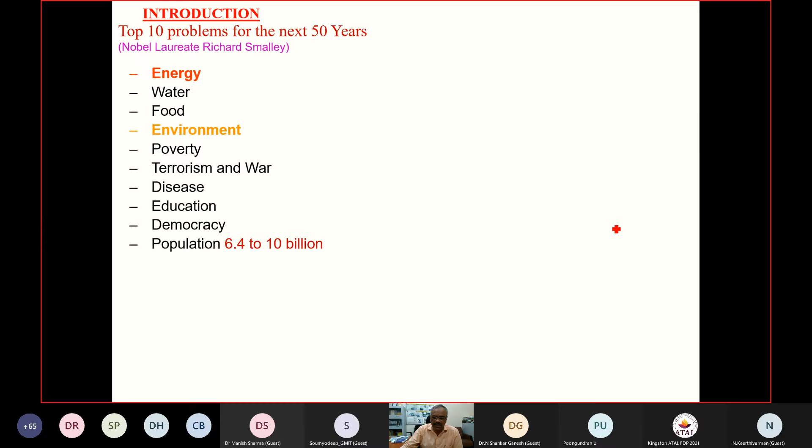We are facing several problems: energy, water, food, environment, poverty, terrorism, war, diseases, education, democracy, and population. Therefore, it's important that the energy problem cannot be addressed in isolation. Energy and environment are important, which is why we are calling it a 4E analysis: energy in terms of quality and quantity, as well as environment and economic analysis.

Food, water, and clean energy are very important. These three things are important.

Out of all these problems, energy can solve some of them, and the world's primary energy is increasing very rapidly in an exponential growth. Energy consumption is rapidly increasing because of industrialization, improvement in standard of living, and population growth. So the standard of living of any country, or an individual, depends on energy consumption. Therefore, it's very important to do a comprehensive analysis of this energy system.

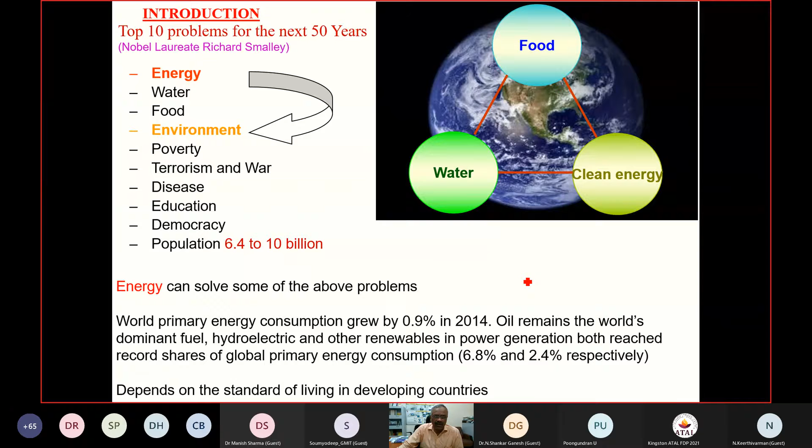In terms of exergy and thermoeconomic analysis of power generation, most of the power generation across the world and in India is primarily based on fossil fuels, which has its own adverse effect on the environment. So in order to minimize and mitigate environmental issues, it's very important to go for energy and exergy analysis of power generation.

These energy sources are broadly classified into two categories: celestial or income energy, and capital energy. Energy reaching the Earth from outer space is called income energy or celestial energy, and this includes solar and lunar energies, which we refer to as non-depletable: electromagnetic, gravitational, and particle energy from stars, planets, and the moon, and potential energy of meteorites entering the Earth's atmosphere.

Capital energy is the energy that already exists on the Earth. Examples are mainly fossil fuels, like chemical forms of energy, nuclear energy, and geothermal energy in the Earth's crust. So generally, capital energy is the source which is already present in the Earth's crust.

For power generation, power means electricity. Electricity is one of the most effective, or you can say highest quality form of energy among all energy forms. Therefore, utilizing electrical energy for our requirements depends on how we produce it, so producing cleaner energy is a better option.

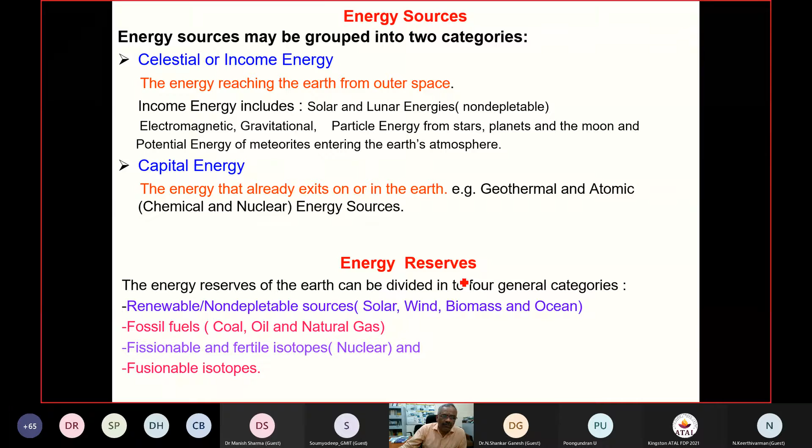If you look at the energy system hierarchy, we have primary energy sources, then energy carriers, and then equipment and services - this is the hierarchy of the energy system. We essentially have fossil fuels: coal, oil, gas, and then biomass, nuclear, and renewables.

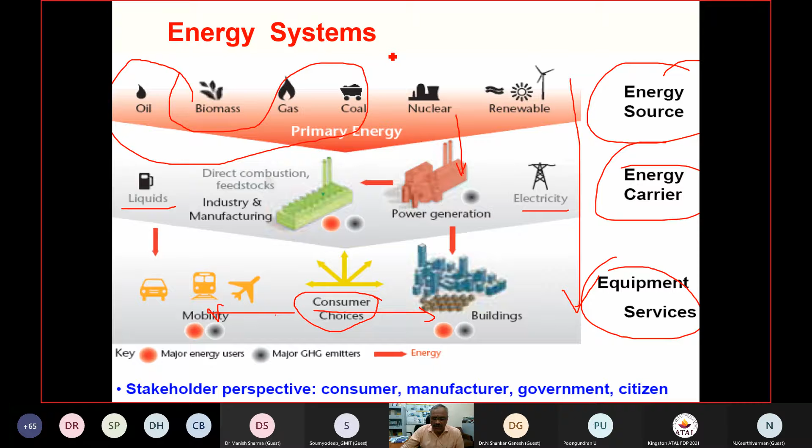These are converted into a secondary form of fuels, which could be high quality energy like electricity or liquid fuels - these are essentially energy carriers, used as per consumer choice, whether it's mobility, building operation, or any other operation. This is a typical energy system hierarchy depending upon the energy transformation effects, so it's very important to know the impact of this.

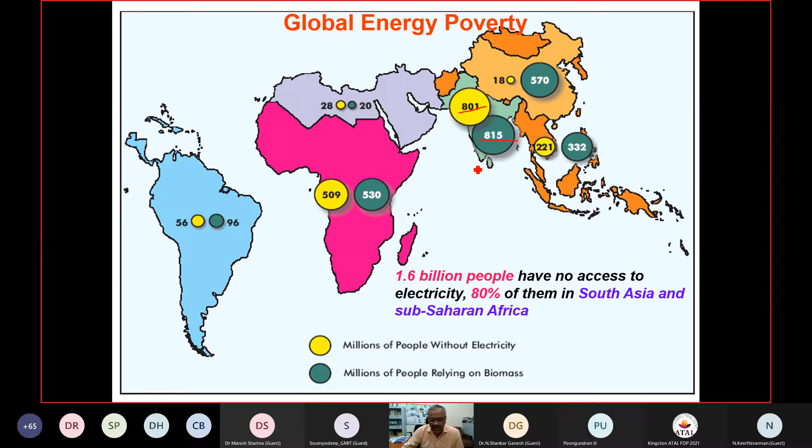So therefore, it's very important to produce electricity, this high quality energy, with renewable energy sources. Energy sustainability is very important. The energy sustainability can be achieved through making use of renewable energy.

We feel we don't deserve this type of thing, because I can say that all energy sources are being imported in India — we import coal, we import gas, we import oil, and we import nuclear energy. So if you import these fuels, mainly fossil fuels, and then try to burn them in Indian conditions, obviously it will have an adverse effect on the environment.

So Indian fuel, foreign coal, foreign fuel, and foreign technology — if you burn it in India, obviously it will have an impact on the Indian environment. So we feel we don't deserve this, but eventually we'll end up in that situation.

So therefore, energy sustainability is very important. Look at this bluish colored earth — it is surrounded by air about 15 kilometers or so, and because anthropogenic activities like energy consumption by human beings on the earth result in emissions to the atmosphere, the atmospheric air is getting polluted, and of course water bodies are getting polluted too.

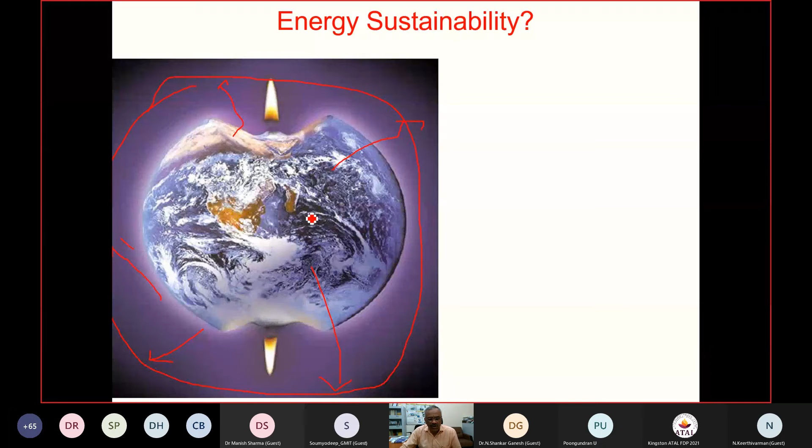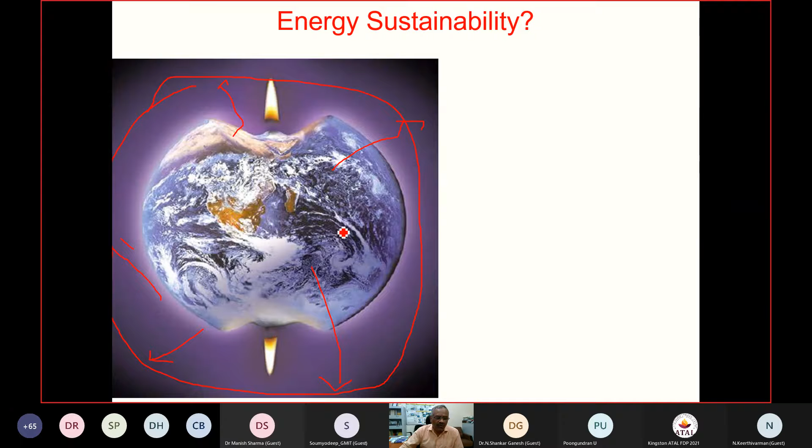Because of these excessive emissions into the atmosphere, this bluish color is completely imbalanced — we are literally burning it off. So it is important to take care of the earth, and come up with appropriate energy technologies. If you overload the Earth's atmosphere, any overloaded system looks like this — if you put too much load, it gets imbalanced. So therefore, energy sustainability is very important.

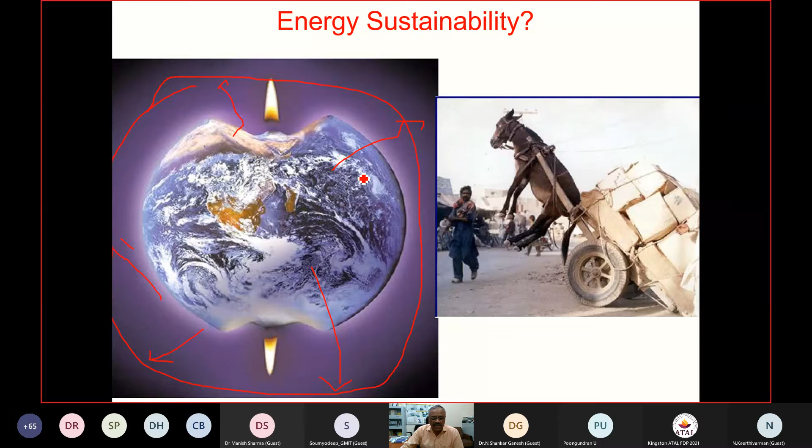The energy sustainability in terms of resources — if we have resources, and if they are fossil fuels, and you start to drain and consume them, this will become empty at one point of time. That means the resources may exhaust, so this may not be a sustainable option.

Therefore, it's very important to come up with indigenous technology and to keep these resources for future generations, so that we can take care of our own share of fuel or resources. But for that, we may need the technology — an energy technology which keeps the resources sustainable. Therefore, those energy technologies are renewable energy technologies.

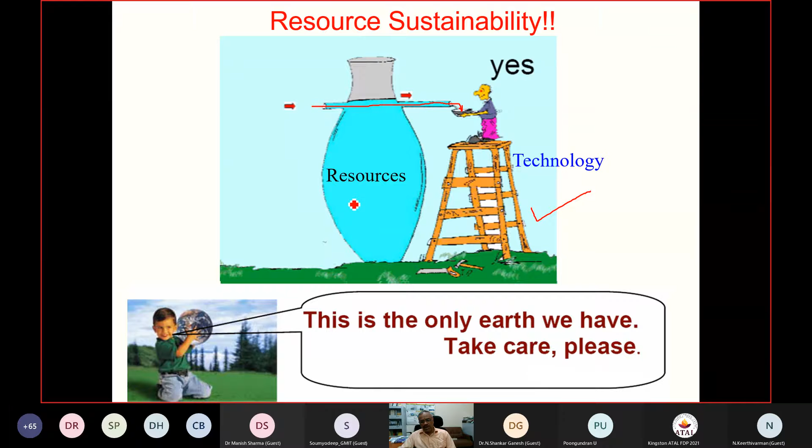Our future generation says there is only one earth we have to take care of, otherwise the earth will become unconducive for living. Therefore, energy sustainability is important, and this could be achieved through energy efficiency, proper mix of energy sources, and making use of renewable energy technologies or renewable energy sources.

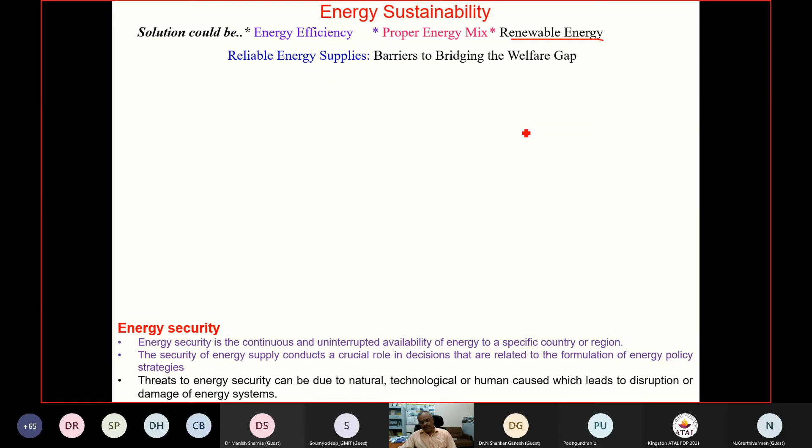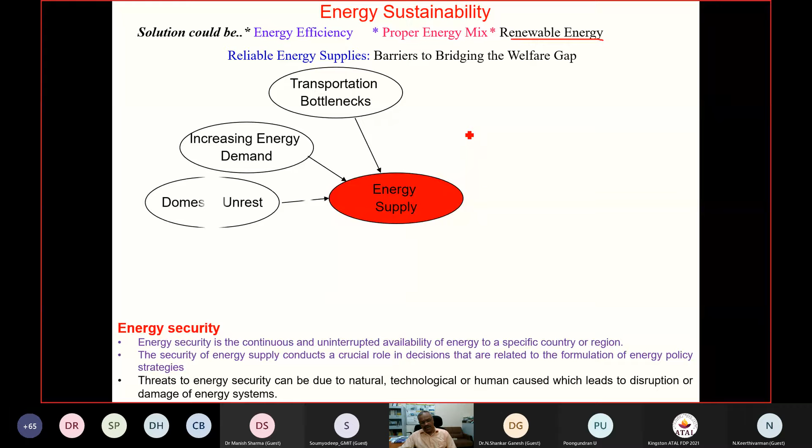So there are barriers to bridge the welfare gap, mainly in order to obtain reliable energy supply. The energy supply is very important. There are several barriers for bridging this, including transportation bottlenecks, increase in energy demand, domestic unrest, energy investment, market deregulation, energy price volatility, technological development, geopolitical instability, increase in energy imports, and so on. So there are several bottlenecks for supply of energy.

There is a substantial increase in demand, as just mentioned, because of industrialization and increase in population and standard of living, which may result in increase in energy demand. But whether this energy demand can be fulfilled by Indian or indigenous fuels - obviously at this point of time no, because we import coal, oil, gas, and more than 70% of oil is being imported. So there is domestic unrest, and the investments that are going in are also very important.

The market is deregulated, and the prices are highly volatile. Every day the petrol prices are getting changed. There should be technological development for energy efficiency, but apart from that, there is geopolitical instability, mainly in the OPEC countries - they cut the production, then obviously the prices will go up, and increasing energy imports is another major problem. That is why the government is more interested in depending on indigenous fuels and so on.

So then one can think of vehicles like energy efficient vehicles, biofuel vehicles, hydrogen fuel vehicles - we are talking about EV, electric vehicles, and so on - and going for new technologies in the building sector, because the building sector is one of the high energy intensity sectors, since most of these buildings are enclosed with glass and other things and require space conditioning.

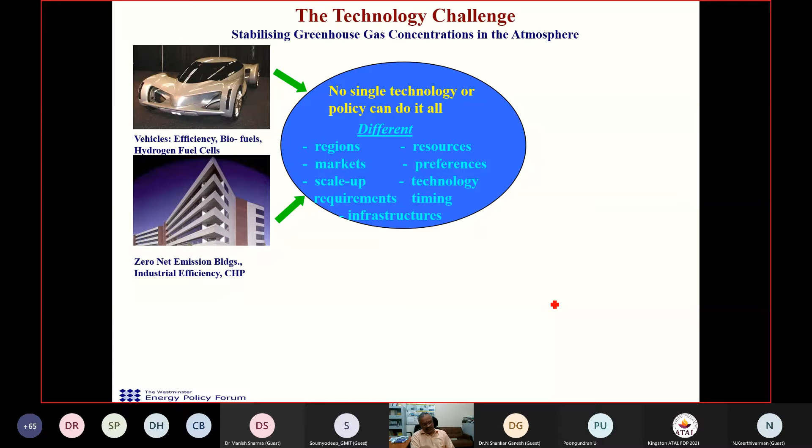Therefore, net zero emission buildings are important. Industrial efficiency is another option, even for industrial buildings. CHP, combined heat and power, is another option for such buildings and so on. Nuclear power generation with 4th generation technology is an important thing, and apart from that, fossil fuel combustion results in emissions, and mainly carbon dioxide is a major environmentally degradable gas, so it needs to be captured - that is carbon sequestration.

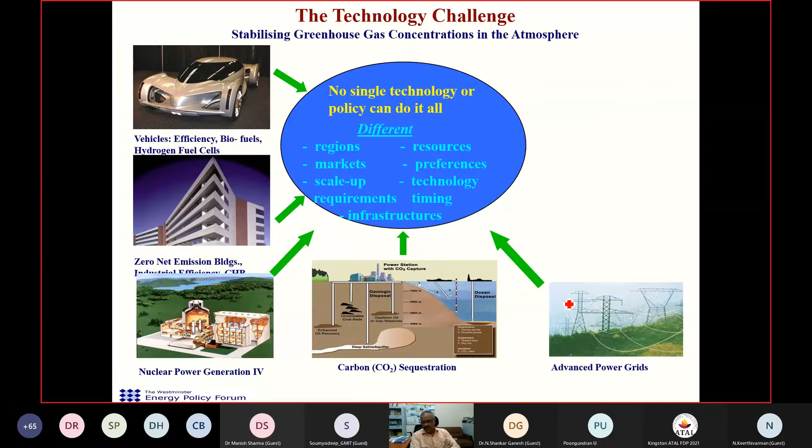It should be captured properly and then stored properly, so that the CO2 is absorbed and used for other applications. Advanced grid transmission and distribution of electricity is also very important, as there is a lot of power losses during transmission and distribution, which may result in very large losses due to T&D losses. That is why we need to transport electricity in the most efficient way with less losses - that's what we call advanced power grids. There is a necessity for that.

Biofuels and power generation is another important aspect, and renewable energy technologies play a major role in this technological challenge. Everywhere - in EV vehicles, net zero buildings, nuclear, carbon sequestration, advanced power grids - technology plays a major role. Therefore, a single technology cannot address this problem.

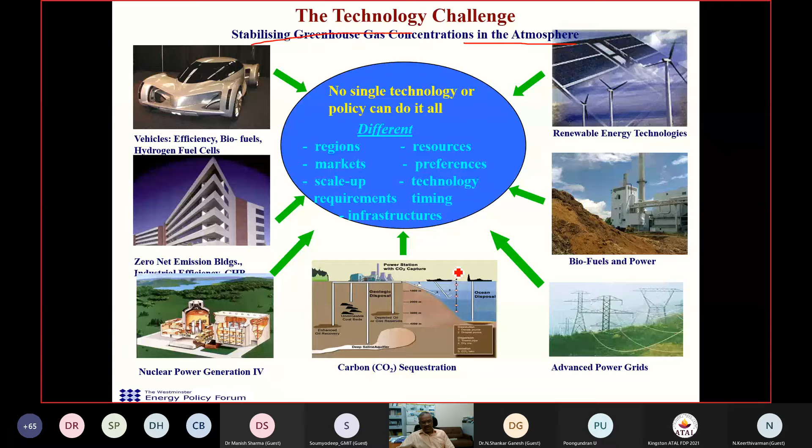There are several challenges, and these technologies eventually result in stabilizing the greenhouse gas concentration in the atmosphere, as we are experiencing global climate change, which may reach very dangerous levels. So therefore it's very important to stabilize the greenhouse gases.

Now, in the Indian context, the power sector is important because power is the highest quality of energy among other forms like thermal, electrical, and mechanical energy. In thermodynamics, you have two quantities like heat and work. Heat can be converted into work, but not completely, whereas work is completely converted into heat. So therefore, work is more valuable and of more quality than heat. So it is important to come up with work in terms of power and so on.

So if you look at the power generation in India, it is increasing slowly, and per capita electricity consumption is increasing rapidly. Now it is somewhere close to about 400 to 500 kilowatt hours per person per year, but it needs to be increased up to 3000 kilowatt hours per person per year. It's projected that energy consumption is rapidly increasing.

So if you look at the current projected installed capacity based on different sources, coal is highest now, but renewable energy is also gaining importance, so there is a lot of potential. But for at least another 2 to 3 decades, fossil fuels continue to be, like coal continues to be, a major fuel for power generation.

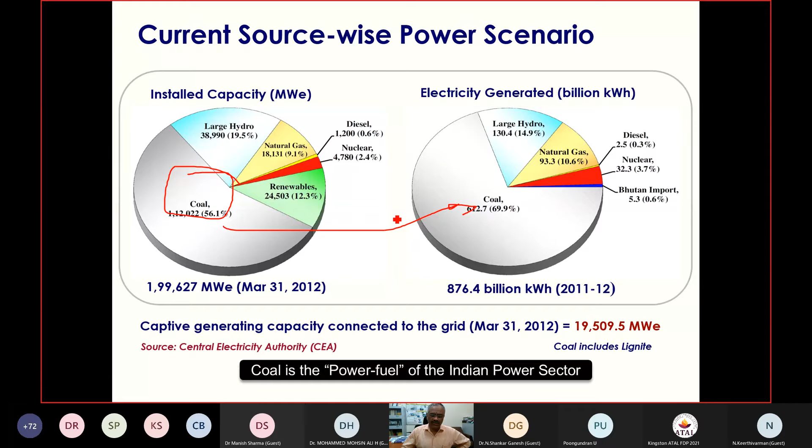So it is very important to look at why we are going for 4E analysis. If you look at the per capita energy consumption in India, it is somewhere at this level, and the world's is higher, and of course other developed countries are much higher. So therefore it's necessary that we should improve per capita energy consumption without affecting the environment.

That is why a holistic or comprehensive analysis of power generation is required through the 4 E's: energy, exergy, environment, and economic analysis. It is a comprehensive analysis to investigate the efficiency, energy utilization, environmental degradation, as well as the economic viability. So that's why we call it 4 E's.

Challenges: the plant efficiencies of Indian power plants are relatively lower due to high ash coal and high cooling water temperature. As most of you are mechanical engineering students, you know power is actually produced by a heat engine which operates between two reservoirs, taking heat from a higher heat source, converting it into work W, and then rejecting the remaining heat into the atmosphere at some atmospheric temperature T2.

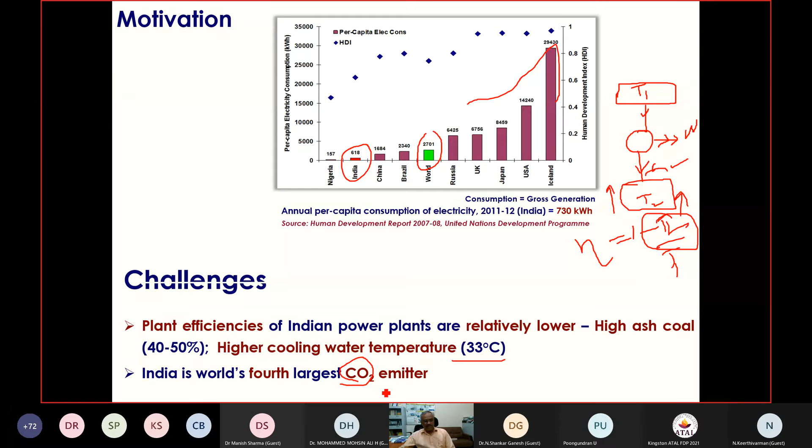So it is very important and challenging to come up with a comprehensive analysis of power generation that balances the trade-off between energy, environment, and economics. We are doing a 4E analysis of power generation, primarily focused on coal-based power generation.

How do we include solar energy so that we can reduce coal consumption as well as environmental degradation? Not only can we reduce environmental degradation, but we can also save fuel.

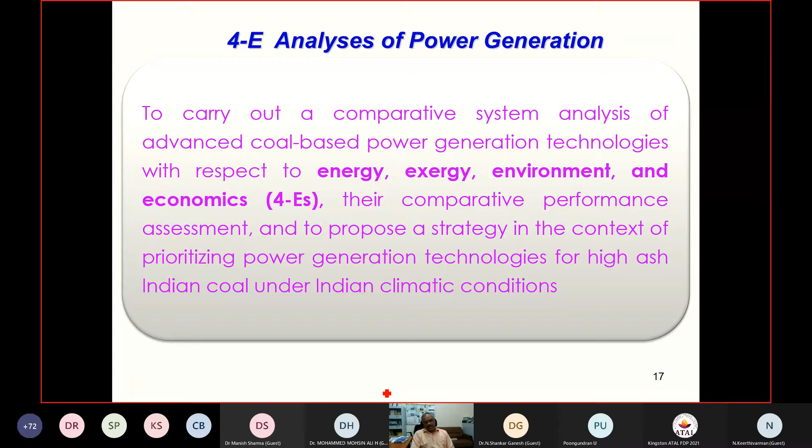In order to do that, we conduct a comparative system analysis of advanced coal-based power generation technologies with respect to energy, exergy, environment, and economic analysis, which we call 4Es, with comparative performance assessment to propose a strategy for prioritizing power generation technologies for high ash coal like Indian coals under Indian climatic conditions, given the higher atmospheric temperature.

Looking at the energy consumption and available sources, if used in this fashion, they may become extinct within a certain number of years. Coal can last only 119 years, oil can last 46 years. This is a global phenomenon, though we have also given the Indian figures.

Looking at coal and oil, oil may not even last one more generation. These are the Indian statistics against world statistics for coal, oil, and nuclear. They may become extinct in a couple of years, and we may not be able to find these resources.

Therefore, it's high time to come up with an exergo-thermoeconomic analysis of power generation in order to identify the inefficiencies and irreversibilities, and also improve performance.

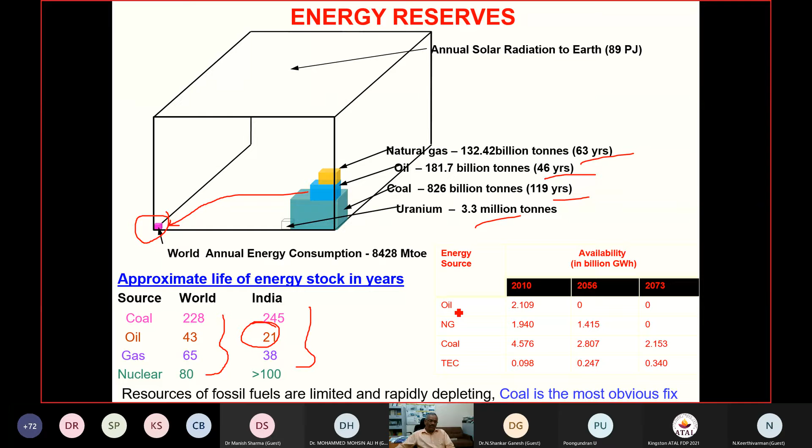Next, we'll discuss the scope of 4E analysis. Since the audience is very broad, I will cover various power generation technologies with respect to 4Es, both conventional and advanced power generation technologies, mainly for high ash Indian coal and imported coal.

We can also compare imported coal. Most of the eastern and western coast plants import coal from Indonesia, Australia, and South Africa. These imported coals have low ash but high sulfur, about 2% sulfur. Indian coals contain only 0.5% sulfur but 30 to 40% ash, whereas imported coals have about 10 to 12% ash but 2% sulfur.

Sulfur dioxide is harmful. Another important thing is that Indian atmospheric temperature of 33 degrees is taken as average, and based on this we have done analysis for subcritical, supercritical, and ultra-supercritical power plants. Based on this, we come up with different combustion technologies as well.

The combustion-based technologies include pulverized coal and ACFBC and PCFBC, which I'll explain. PF is pulverized coal fired combustion. ACFBC is atmospheric circulating fluidized bed combustion, and PCFBC is pressurized circulating fluidized bed combustion. OCC is oxy coal combustion. PPCC is pressurized pulverized coal combustion, and IGCC is integrated gasification combined cycle.

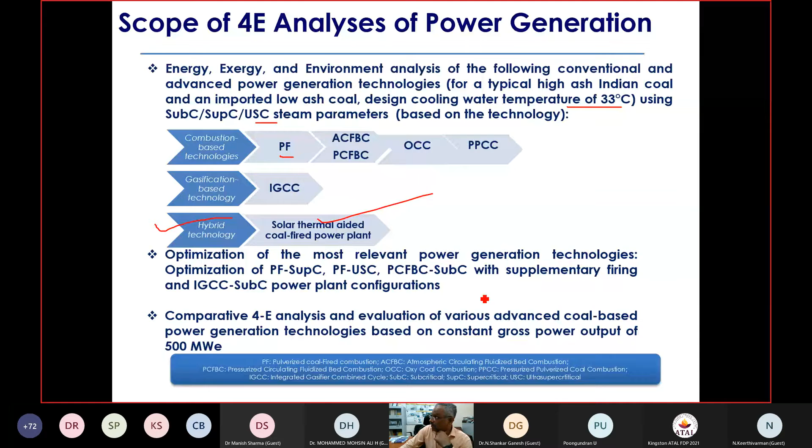So the scope of this 4E analysis includes this, but finally I will only discuss the solar aided coal-based power generation.

You have already heard about exergy, energy, and the difference between them, but I'll give some additional information related to that, because this is my point of view. Generally, exergy is equal to energy minus anergy losses. So here you have energy and losses - one tells quantity and the other tells quality.

Exergy is the maximum work obtainable as the system comes to equilibrium with the surroundings. The higher the value of exergy, the more work obtainable from the system. We discussed the first law and second law - the first law tells us the quantity of energy, and the second law tells about the quality of energy.

The first law of thermodynamics makes only an energy balance of the system or control volume. It doesn't distinguish between different forms of energy, particularly work and heat, or heat available at different temperatures - meaning internal energy. It is the second law which asserts that, from an engineering point of view, all forms of energy are not of the same quality. Energies of two systems may be quantitatively equal, but qualitatively different. For example, if you take steam and adiabatically throttle it, the energy does not change, but the quality degrades.

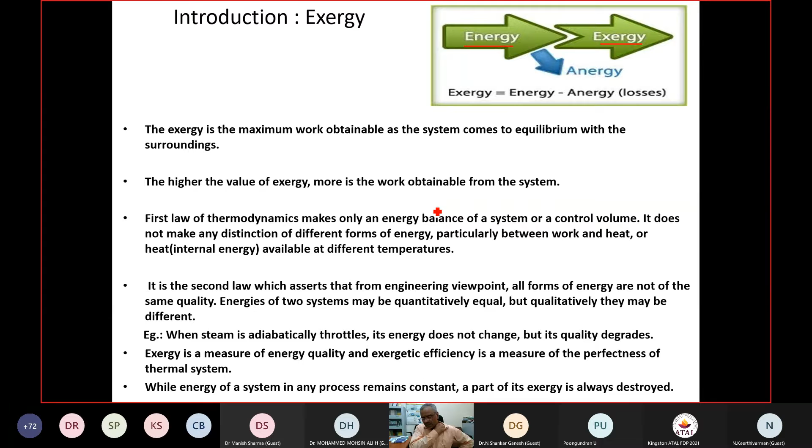Exergy is a measure of energy quantity and energy quality, and exergetic efficiency is a measure of the perfectness of thermal systems. While the energy of a system in any process remains constant, part of its exergy is always destroyed. This is about exergy.

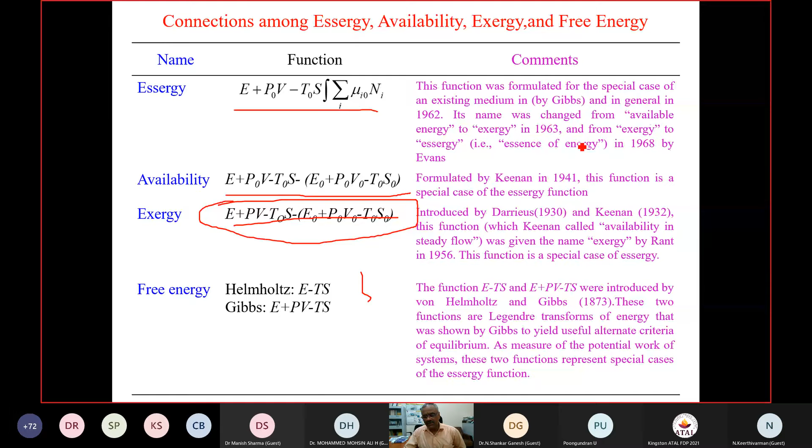E is the internal energy, P is the pressure, V is the volume, T is the temperature, and S is the entropy. Free energy, like Helmholtz or Gibbs free energy, is given by these expressions, and their descriptions are given here. There are several indicators given in this fashion, but I am not going to discuss them.

When we look at second law analysis, we generally come to effectiveness or exergetic efficiency. Effectiveness is given as the theoretical minimum available work to accomplish a task, divided by the available work to accomplish the task - a ratio also represented by epsilon. That means it's a ratio of the energy, work, or heat usefully transferred by a system to the maximum possible heat or work usefully transferable for the same function using the same energy input as the given system.

So the factors - because generally there are inefficiencies involved - there are several factors which influence these inefficiencies. The factors that contribute to inefficiencies are losses, which result in loss of energy or availability, and these include several types that differ from energy form to energy form.

For example, if you look at mechanical energy, friction, impacts, and damping are the major sources of irreversibility. For fluid energy, line losses, fluid leakages, flow restrictions, fouling, and corrosion are the major sources of energy loss.

Heat energy loss occurs by convection, conduction, radiation, infiltration, and exfiltration, which are the major sources of irreversibility, because heat transfer cannot occur at constant temperature. In order to transfer heat through convection, conduction, or radiation, there is a basic requirement of a temperature difference or potential, delta T. This delta T results in the transfer of heat. If delta T is higher, the potential is higher, but so are the losses.

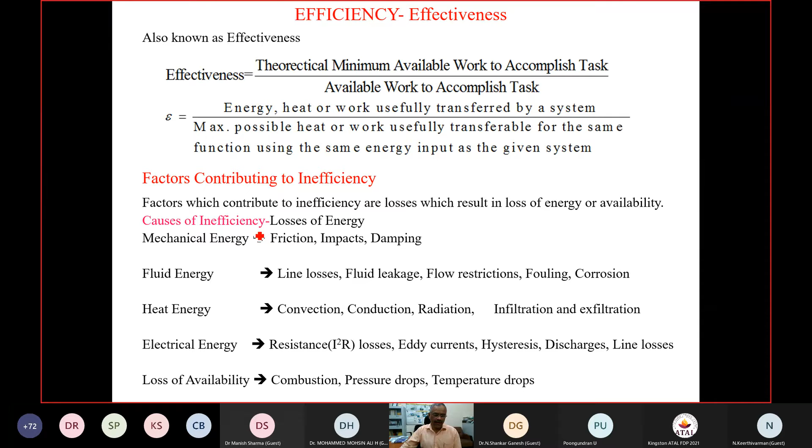Apart from that, electrical energy losses mainly involve I-squared-R losses, eddy current, hysteresis and discharges, and line losses - several of these are involved. And of course, loss of availability through combustion, pressure drops, and temperature drops are the major factors contributing to the inefficiencies of the system.

How do you write the second law efficiency? The first and second laws of thermodynamics for a steady flow process with multiple inlets and exits can be expressed as Q dot minus W equals sigma m dot, considering the exit minus entry streams.

So the second law, based on entropy generation, is always greater than or equal to zero. Therefore, entropy at the exit minus entropy at the entrance, and of course the entropy by the surroundings.

Here, Q surroundings is minus Q, because it's given to the atmosphere, it's lost to the atmosphere. S generation is the entropy generation of the process.

Eliminating all heat transfer terms, we come up with a comprehensive analysis of work transfer, and this is the actual work done during this process, which is also useful work, since steady flow devices have fixed boundaries and do not involve any work done by or against the surroundings. So this is the second law equation based on this.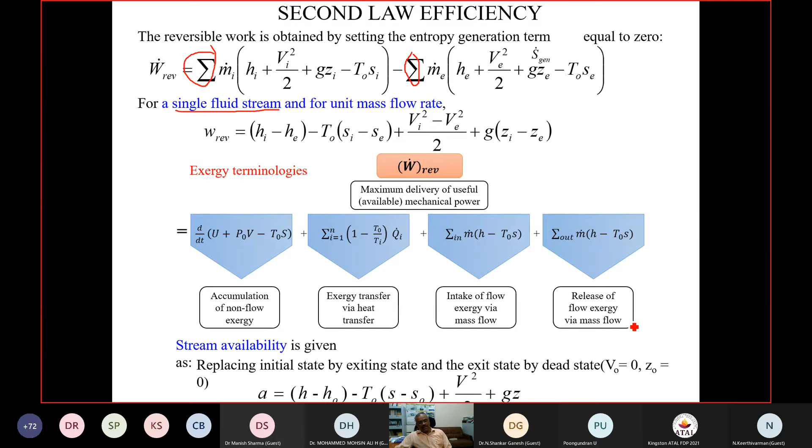So if you replace that, you'll get the availability term, and this reversible work is the change in availability, which can be given by this change of availability, A1 minus A naught.

So the rate of irreversibility associated with steady flow processes is also important. You can see here irreversibility is given by reversible work minus the useful work, and so it can be given as T naught into S generation dot.

So therefore this irreversibility needs to be calculated for every process, and then we try to minimize it based on this, based on the availability.

So what is the significance of exergy? You can look at this equation, the generalized equation with multiple entries and exits, and the maximum work, and this is the last term where the exergy work loss, or loss of available work, is always positive.

So therefore the work is given by reversible work minus the irreversible work. So irreversible work equals reversible work minus irreversibility. So therefore the exergy loss is given by this term.

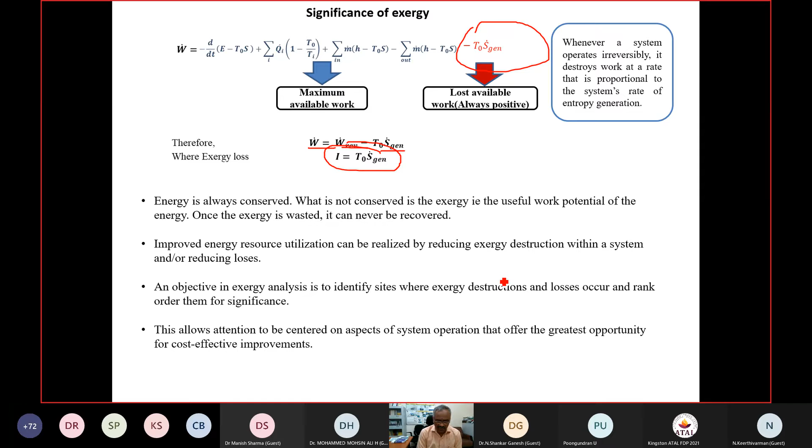What I mean to say here is that exergy analysis of power generation means you have to identify the sites where there is irreversibility or exergy destruction or losses occurring, and put them in a sequence. You have seen power plants have four processes: heat addition in the boiler, expansion in the turbine, heat rejection in the condenser, and pumping. If you look at these four components, where is the highest irreversibility? You prioritize and put them in order of significance where the high irreversibility exists.

So therefore I will give you a simple Rankine cycle. Just now I mentioned it involves four processes: you have heat supply at the source, expansion in the turbine, heat rejection in the condenser, and pump work added to bring it back to the system, and it undergoes a cyclic process.

So the exergy analysis of each steady flow component of the power cycle allows us to determine the distribution of irreversibility among the cycle components. So therefore, where we find high irreversibility in these four components is important. Then accordingly we can fix the problem and improve the performance of the power generation cycle.

The Rankine cycle, consisting of four steady flow components—pump, heater (boiler), turbine, condenser—operates between TH and T naught, and the energy interactions experienced by the components are indicated by arrows that point in the correct physical direction.

You can see the directions of these arrows here. This arrow is going out, this arrow, and this arrow, and then the work is in here and here, then work is out, and then heat is in and heat is out.

So I'll give you one simple combustion process, exergy analysis of combustion. This is given by this equation. It's a chemically reactive system. The standard Gibbs function change is given by that, and the change in enthalpy of formation is delta H, and this is in terms of minus NCV.

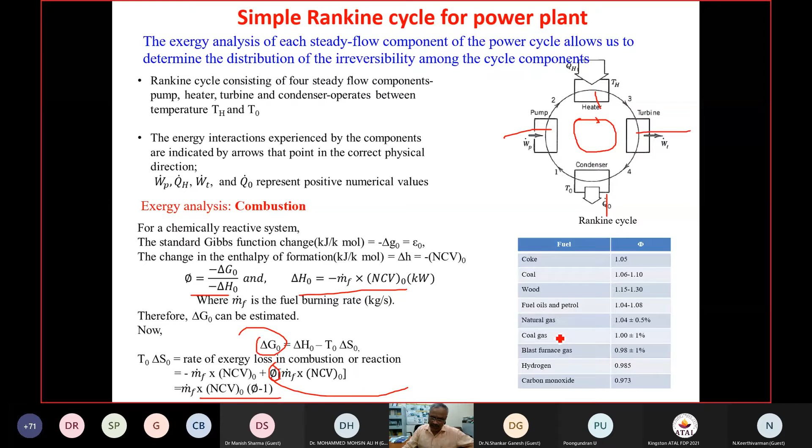Now if you look at this phi, the phi is an important value here. The phi value for different fuels like coke, coal, wood, fuel oil, petrol, and so on, their values are mentioned here.

So therefore, in second law analysis of mainly vapor cycle, we need to find out irreversibility. Irreversibility of steady flow systems, using the steady flow energy equation, exchanges heat with the reservoir at temperature Tr, and can be expressed in terms of I naught, I dot, which is T naught into S generation dot, and that is given by the previous equations.

When you have multiple entries, sigma will come in, and multiple exits. For irreversibility of any steady flow system, consider unit mass with single inlet and single outlet, then you can eliminate the sigmas here, and you get this, which per unit mass is I, not capital I.

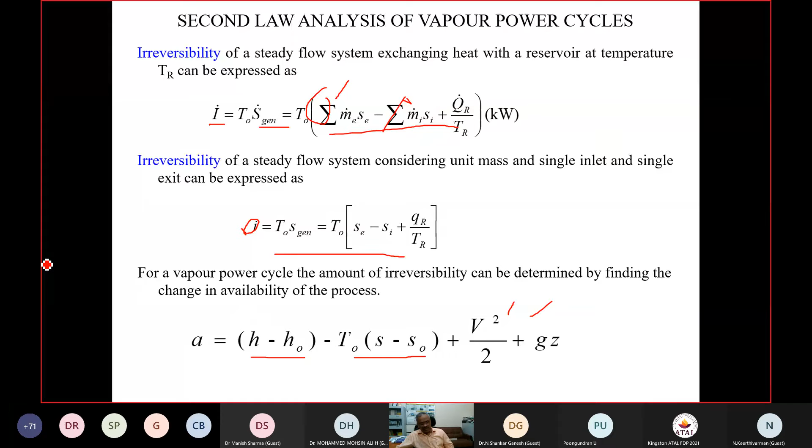For vapor cycles, the amount of irreversibility can be determined by finding the change in availability of the process, that is availability with reference to enthalpy, with reference to heat, and then with kinetic energy, potential energy, and so on. So the datum or reference point is taken as H0, where the energy transformation or availability occurs.

So our methodology, though I mentioned 4E here, economic analysis will come later. So for the energy, exergy, environmental analysis, we carry this out using a flow sheet program, which we call Cycle Tempo.

Cycle Tempo is a flow sheeting software, and essentially mass balance is done, energy balance is done, exergy balance is done - physical exergy balance and chemical exergy balance - and finally chemical species balance have been done with these, and these are the parameters. Anyhow, you can go through that.

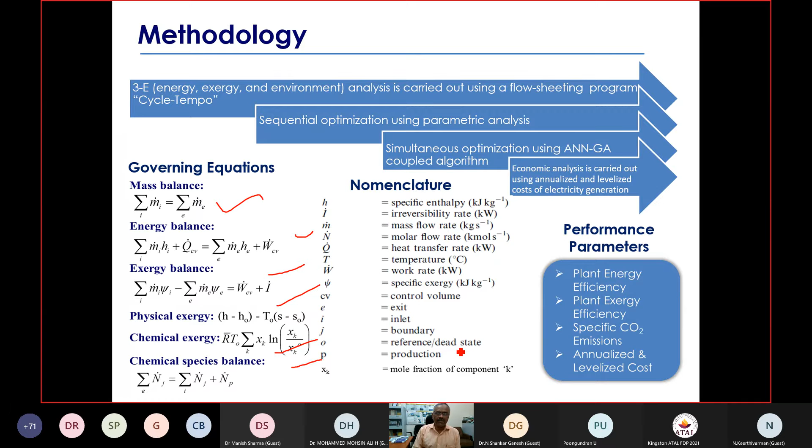The performance parameters which we need to study are plant energy efficiency, plant exergy efficiency, specific CO2 emissions, and annualized and levelized cost of electricity generation as part of our 4E analysis.

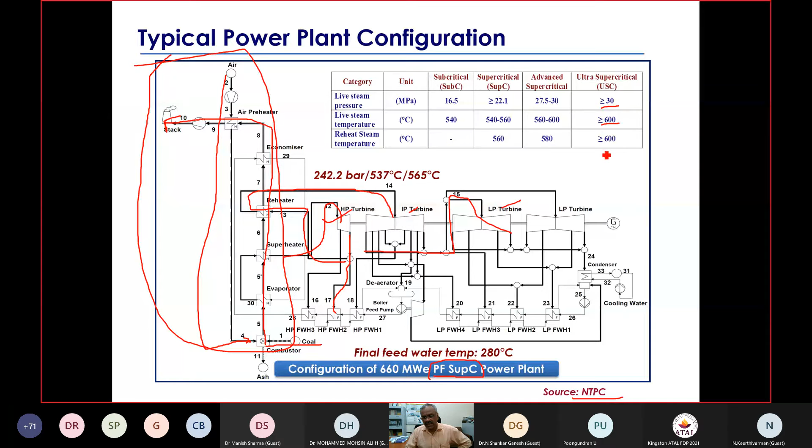So therefore, we have different types. This is adopted from NTPC configuration. You can see various pressures, temperatures, reheat temperature and reheat pressures given here for various subcritical, supercritical, advanced supercritical, and ultra supercritical power plants. Live steam pressure can go up to 30 megapascal, live temperature can go more than 600 degrees Celsius, and reheat steam is also greater than 600.

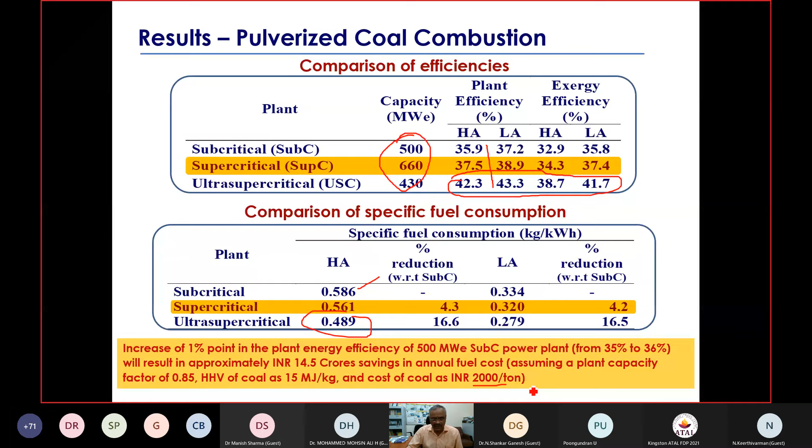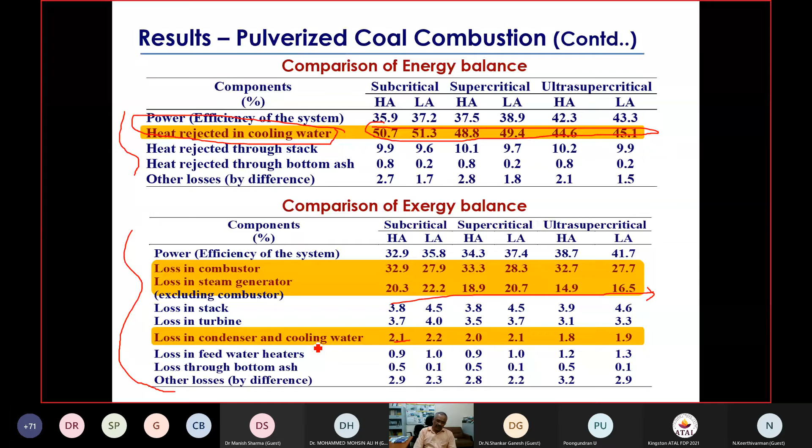They are minor. Loss in condenser cooling water is about 2.1% and so on, and it differs from various options, both low ash and high ash fuels. Now, if you see the results for pulverized coal combustion, we can operate at design condition or part load condition, because most of these power plants do not operate at 100% all the time.

So sliding pressure is more advantageous than throttling control for part load operations. Then the effect of condenser pressure on plant efficiency: Indian condenser pressures are different because they depend on the local wet bulb temperature or saturation conditions. Plant efficiency and plant exergetic efficiency are dependent on condenser pressure. As the condenser pressure increases, the variation in plant efficiency decreases - that is the major thing to notice here. As condenser pressure increases, the plant efficiency drops.

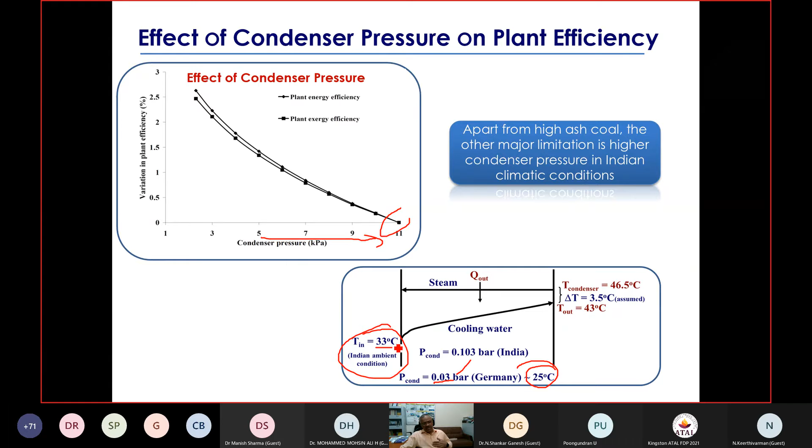You have to arrive at the saturation pressure corresponding to this temperature. In Germany it can be operated at much lower pressure—almost 0.1 versus 0.03, almost one third. For example, in Germany the ambient temperature is 25, while we have considered 33. So higher ambient temperature means less efficiency.

So optimization of steam cycle parameters has also been done for different conditions. We compared both India and Germany conditions here in terms of pressure and temperature—talking about 350 bar and 700 degrees Celsius.

When operating at very high pressures and temperatures, the materials have to be very strong, otherwise the material cost will go up drastically. As a metallurgical parameter, every 50 degree increase in temperature may result in almost 30% weakening—the tubes become weaker, so we have to go for thicker boiler tubes. Therefore, current supercritical parameters in India are way behind the state-of-the-art technologies.

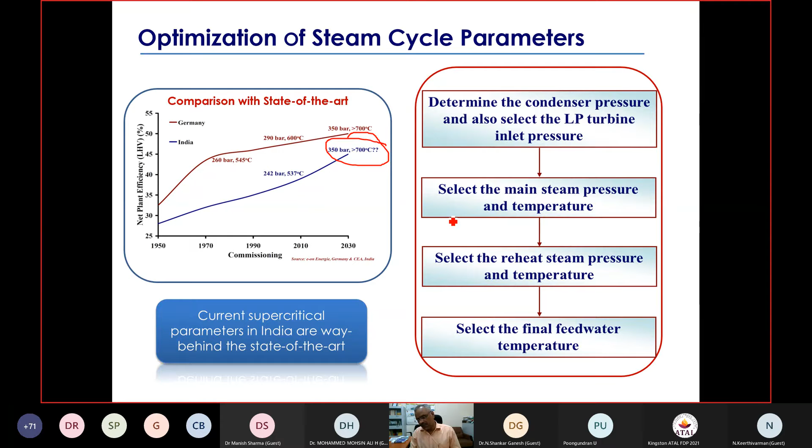So the flow chart for this includes determining the condenser pressure, selecting the low pressure turbine inlet, subsequently selecting the main steam pressures and temperatures, selecting the reheat steam pressures and temperatures, and selecting the final feed water heater temperature.

Based on pulverized fuel plant optimization, the effect of main steam pressure has been studied, with temperatures up to 700 degrees Celsius. This is steam pressure versus change in plant efficiency—as we increase the steam pressure, there is an increase in plant efficiency in terms of percentage points.

Main steam pressure is about 290 bar for supercritical, and 350 bar for ultra supercritical, with main steam temperature of 600 degrees for supercritical—here is the pressure and here is the temperature. So the maximum temperature can go up to 700 degrees Celsius, whereas the pressure is 350 bar.

Generally, supercritical power plants have two reheats. If you go for reheats, the first reheat effect is also very important and substantial. We have to consider the ratio of reheat pressure to the main pressure, and the reheat steam temperature is almost 20 degrees greater than the main steam temperature.

So the reheat temperature should be higher than at the main steam pressure—the pressure is low, but the temperature is higher. As you know, in a power plant cycle it goes like this, then comes here, then goes like this: the reheat pressure is low, but its temperature is higher than the main steam temperature, about 20 degrees higher. So about 620 degrees on this T-S diagram.

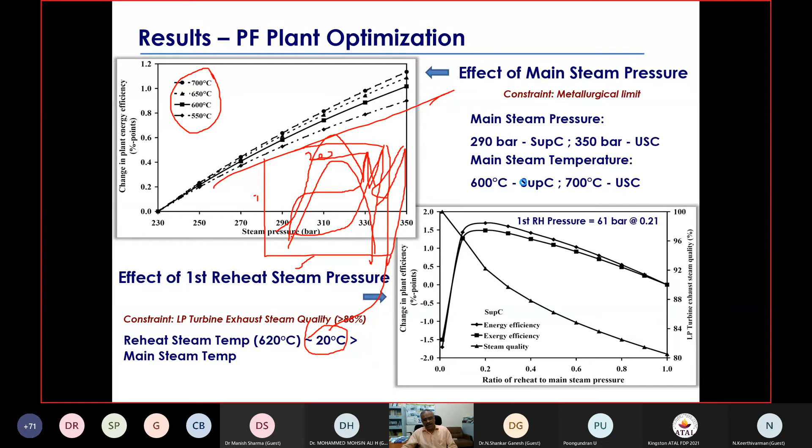Then looking at plant optimization with a second reheat pressure—in that case I've shown only a single reheat, but you can go further and add a second. This is mainly possible when you go for supercritical pressure power plant cycles. So the effect of second reheat steam pressure is very important, and it can be shown here.

First reheat at 85 bar and second reheat at 26 bar, with temperatures plus about 20 degrees. We can go for either single or double reheats with different ultra supercritical configurations, and the corresponding temperatures, energy efficiency, and exergetic efficiencies are given here.

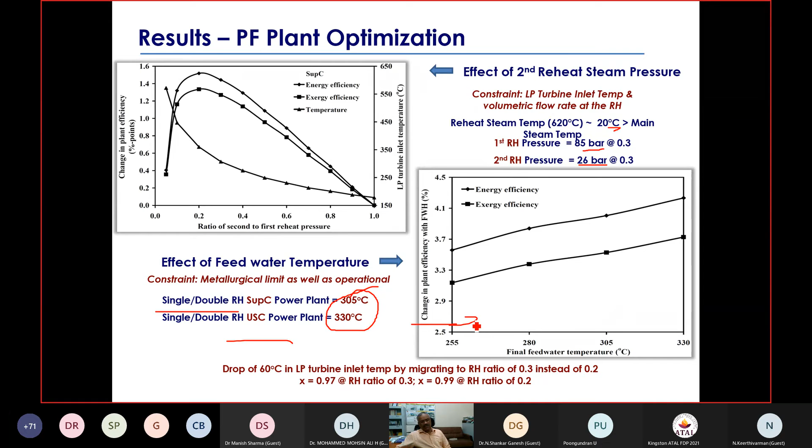If you drop about 60 degrees in low pressure turbine inlet temperature by migrating to a reheat ratio of 0.3 instead of 0.2, with dryness fraction 0.97, and the reheat ratio of 0.2 giving dryness fraction 0.99, the reheat pressure is as shown. Then looking at optimization, these are the optimum parameters finally evolved.

The biggest plant considered in this case is the 800 megawatt supercritical power plant, with this configuration, and the corresponding feed water and steam qualities are shown here. The performance parameters of sequential optimization of the 800 megawatt PCC supercritical and ultra supercritical power plant configurations are shown here.

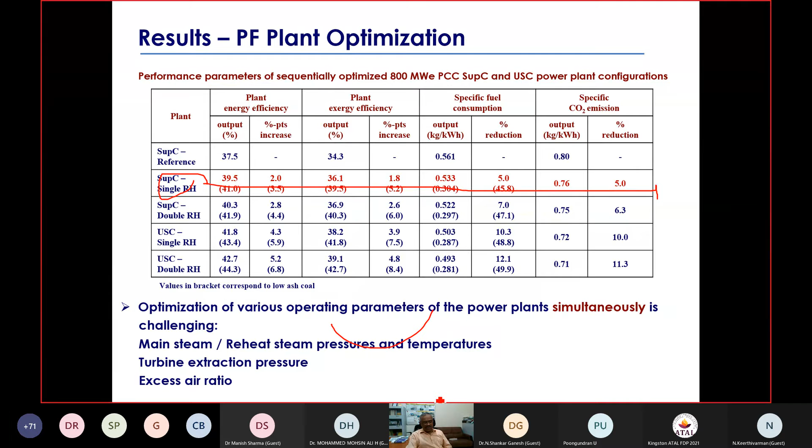You can see this single reheat supercritical configuration shown in this fashion—this supercritical case is important here. The optimization of various operating parameters of the power plant simultaneously is challenging, and the main steam and reheat steam pressures and temperatures, turbine extraction pressures, and excess air ratios are all very important in this case.

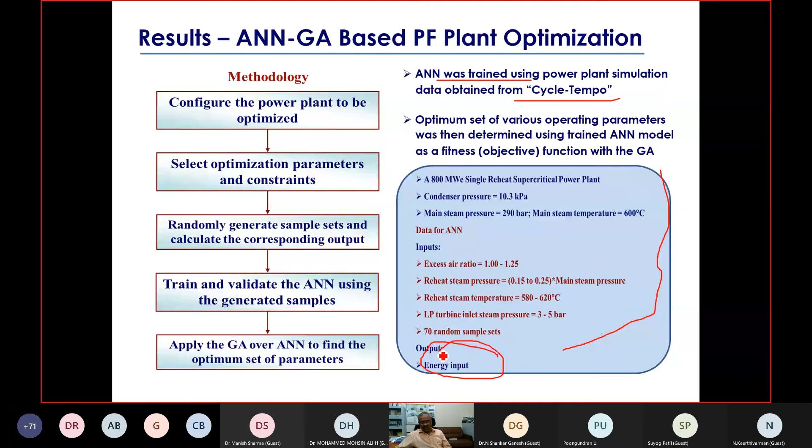Then we went for another technology: neural networks and genetic algorithm based pulverized fuel plant optimization. This methodology is similar to the previous one, using cycle tempo and neural network power plant simulation. These are the parameters, and the output energy is found for given input parameters by applying GA. This is the basic architecture of the neural network with different input parameters, and ultimately the goal is to get the minimum heat input.

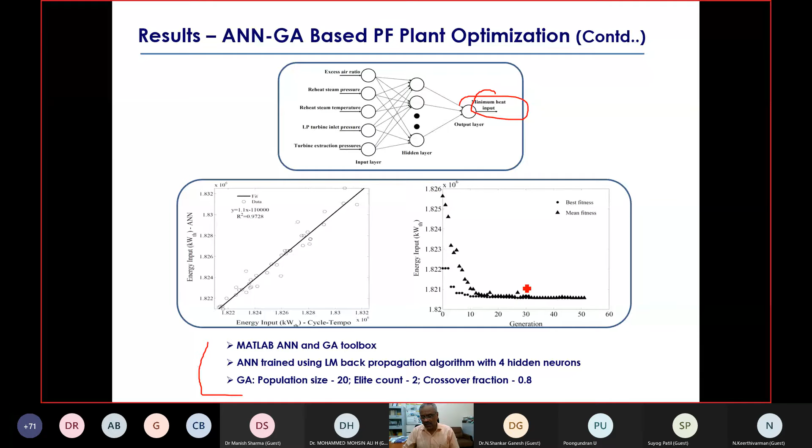These are different conditions. Then we went for oxy-coal combustion. We burn coal, and as mentioned, Indian coal contains high ash. So combustion requires a large amount of air. When you use air for combustion, the nitrogen in air, which is almost 71 or 79%, reacts, leaving only oxygen to react with the fuel. This nitrogen is almost 70-71% of the air.

What happens is this nitrogen reacts at higher temperature and becomes NOx. NOx is another major source of environmental problems. So in order to reduce this NOx, instead of burning with air, we burn with oxygen directly. This is called oxy-coal combustion, where instead of air, oxygen is used for burning.

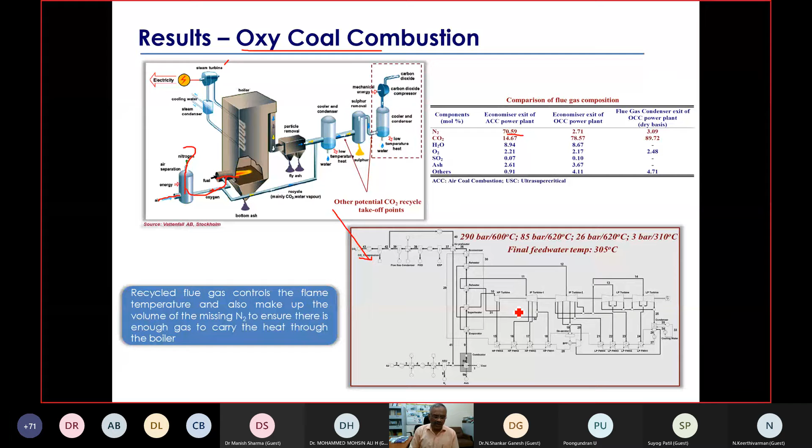Air is first taken from the atmosphere, nitrogen is let out into the atmosphere, and oxygen goes in, then fuel is burnt here. This is a typical setup. Once this comes out, there is recirculation, and electricity is produced. If you translate this into the cycle, it looks like this - a recycled flue gas control for flame temperatures, and so on.

Oxy-fuel coal combustion characteristics here show various losses and percentage of power efficiency - efficiency is 28%, and the remaining are losses. Most of the heat is rejected to the condenser, about 41%. It has been compared with reference plants - reheat, double reheat, ultra-supercritical and supercritical power plants. This shows the oxy combustion plant values and efficiencies, but the losses in flue gases are more here.

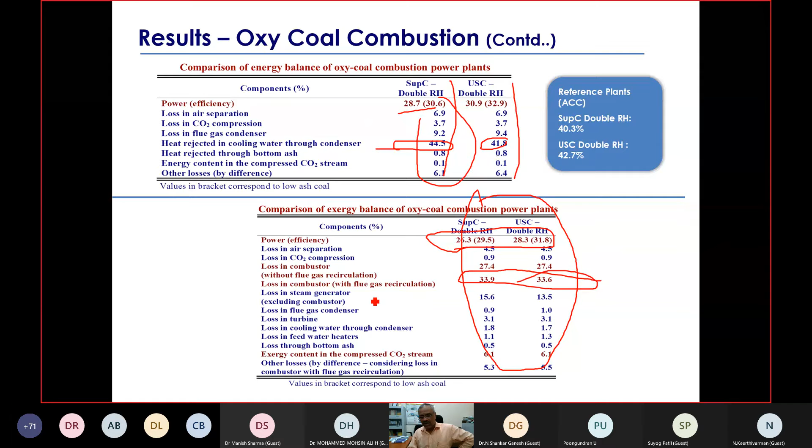So then for PPCC power generation - this is a 62.5 megawatt pressurized pulverized coal combustion plant. PP means pressurized pulverized coal combustion. The 62.5 megawatt pulverized fuel plant is repowered with PPCC, considering first the pulverized case, then adding pressurized pulverized combustion to see the impact. The design plant is 62.5 megawatts, and repowered means we increase the power to 160, with plant efficiencies substantially improved, both exergetic and energetic.

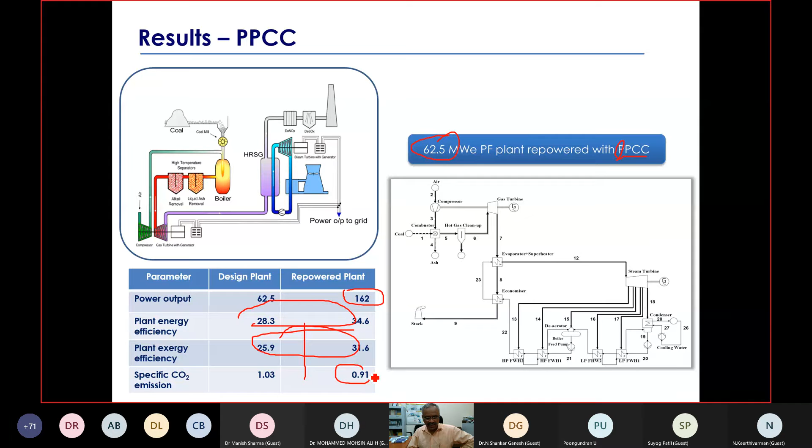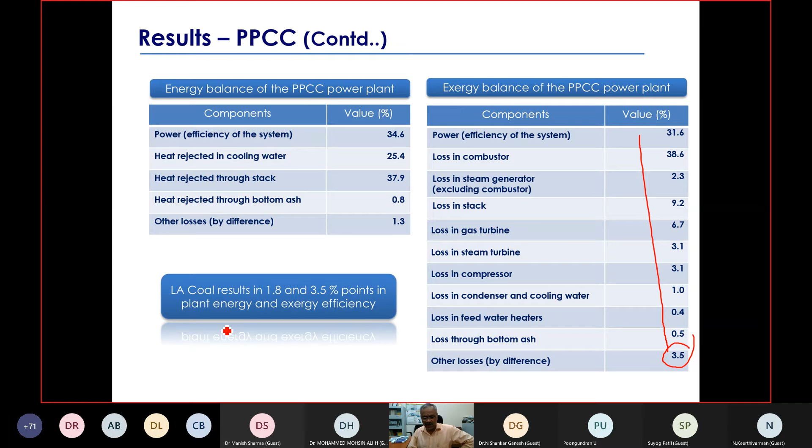Then there is a reduction in CO2 emissions. Some results show efficiencies given here at 31%, losses in combustion are given, and ultimately the other losses as well. Low ash coal results in about 1.8 to 3.5 percentage points improvement in energy and exergy efficiencies.

This compares both high ash and low ash coal. It has been calculated that low ash will always have better efficiencies, up to 45% and so on. IGCC is an important concept, but of course the scale of operation is very important.

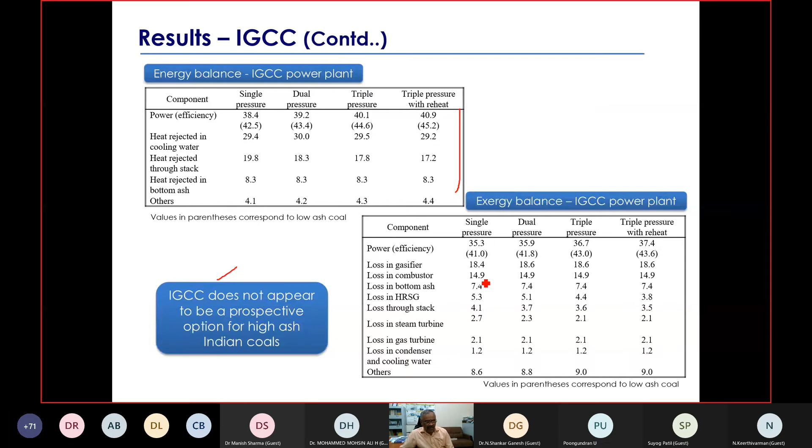The various components like single pressure, double, dual pressure, triple pressure, and triple pressure with reheat have been carried out, and these are some of the results. IGCC, the conclusion is this: IGCC does not appear to be the prospective option for high ash Indian coals. We have studied a wide variety of power plants, but for IGCC, Indian coal may not be very attractive because of the gasification and further losses in various components, including HRSG.

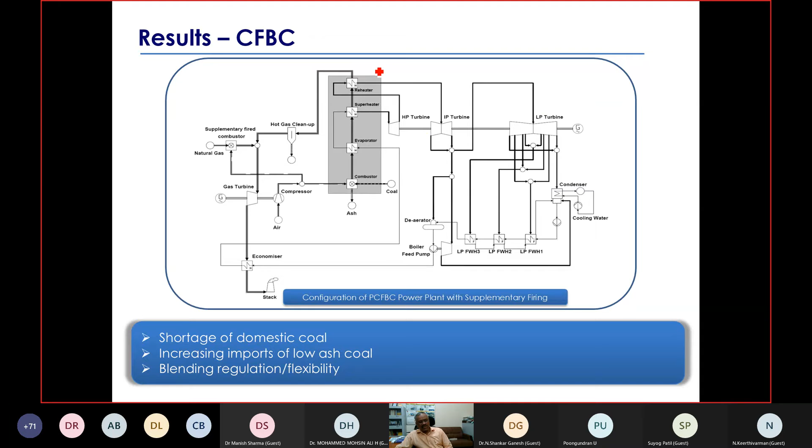This circulating fluidized bed combustion is this configuration here. When we have shortage of domestic coals, increase in imports of low ash coals, blending regulation/flexibility, in that case we can go for circulating fluidized bed and then come up with a power generation concept. But ultimately the results are compared and analyzed with different options.

In this, the supplementary firing appears to be best for Indian conditions with PCFBC with supercritical power plants. But then, this is about power generation—we have wider options, but ultimately these environmental issues are major problems here. Almost very large amount of economic analysis, large amount of environmental things.

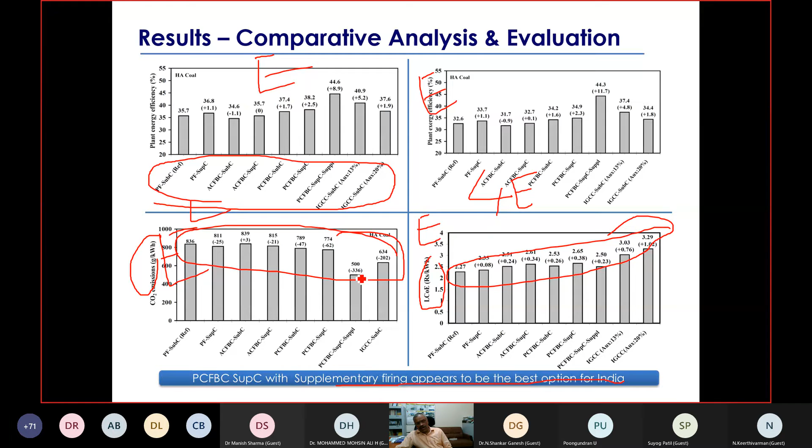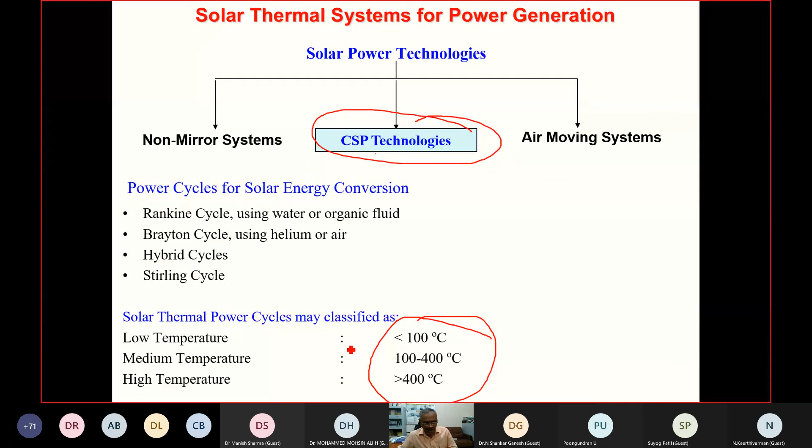In these power plant cycles for solar energy conversion, CSP is the important technology which can be used for power generation. Rankine cycle using water and organic fluids, Brayton cycle using helium and air, hybrid cycles and Stirling cycles can be used. There's a typical range of operating conditions for different thermal power cycles: low temperature, medium temperature, high temperature. If it is below 100, it's low temperature; 100 to 400 is medium temperature; and greater than that is high temperature.

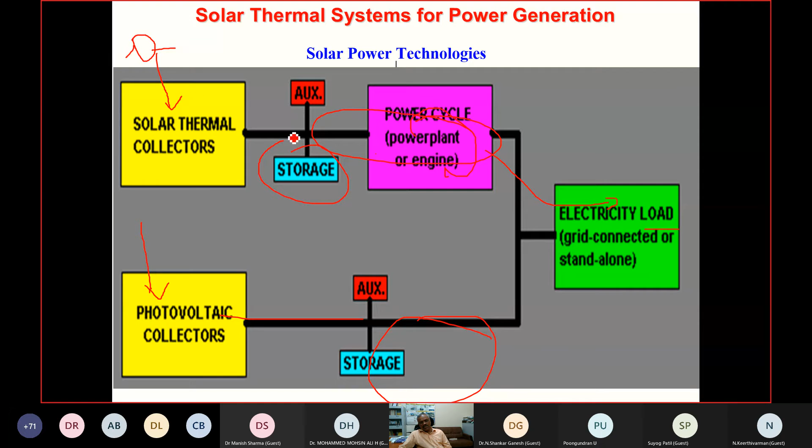This is what we call thermal collectors, but there is a photovoltaic system also. In photovoltaic, the sun's energy is converted directly into electricity. In order to improve the reliability, storage is included in this, along with auxiliary systems.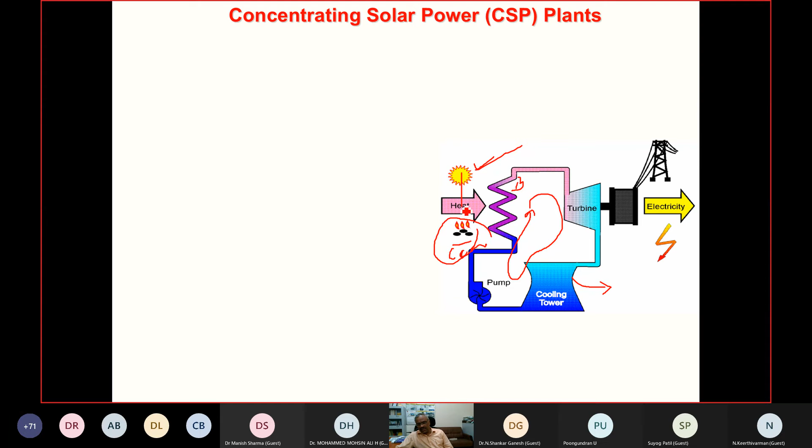The heat is supplied at this source, and this is the sink where heat is rejected, and it produces work here. But this heat is supplied by coal—this is coal, coal burning. If we replace this coal by the sun, then it's called solar, concentrating solar power. But how do we use this heat? How do we convert the sun's energy into heat? There are different technologies here.

These are the 4 different technologies which convert solar energy into heat and are subsequently used: parabolic trough, linear Fresnel reflector, power tower, and parabolic dish. These are the 4 technologies which convert solar energy into heat and which can be integrated with a power plant. This CSP technology is based on temperature—these 4 technologies also have mentioned temperature ranges. For medium temperature, 100 to 400, we use the linear Fresnel reflector and parabolic trough, whereas power tower and parabolic dish are used for high temperature applications.

Now, if they work, what happens is if you replace this, it works only 8 to 10 hours. Then what do you have to do?

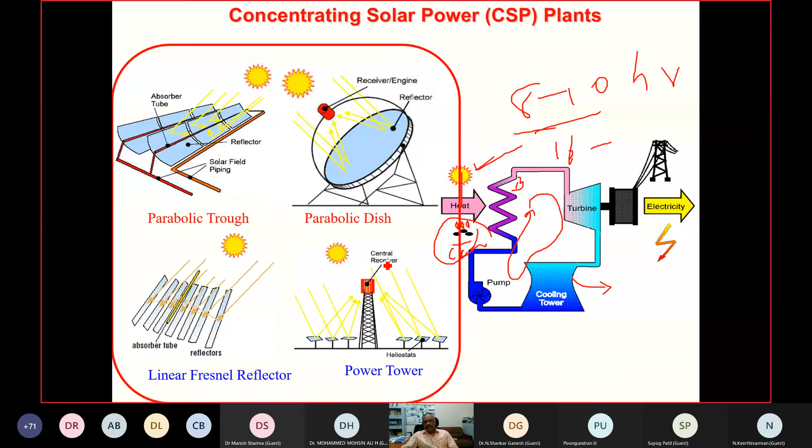What you have to do is go for energy storage. Energy storage is expensive, and almost 8 hours means the remaining 16 hours require energy storage or auxiliary. So therefore, since we already have coal power plants, why don't we integrate solar systems into coal? Then they call this solar aided coal power plants. This is what I mentioned in my title, because this is the 4E analysis of that.

Suppose if there is no sun, then it operates directly with coal. When the sun is there, solar energy comes in, because we have almost 300 clear sky, sunny days, and 600 to 2200 kilowatt hours per meter square available, which is about 2 lakh megawatt equivalent. This energy potential means only about 4% of the Indian desert is enough to produce this. So with solar, there is a fuel conservation or power boosting mode—it can either increase the power or reduce the coal.

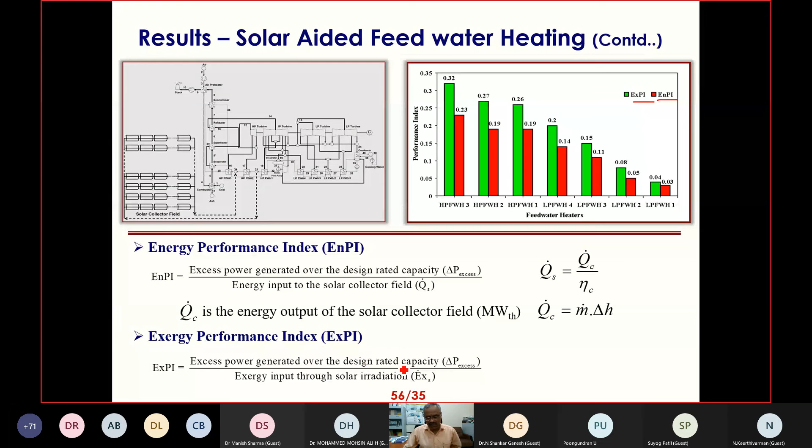Based on the solar aided feed water heater, we have done a performance index with Exergy and energy performance indices for different feed water heatings. In terms of energy performance indices, it's the excess power generated over the design rated capacity divided by the energy input to the solar collector field. For Exergy, it's the excess power generated over the design divided by Exergy inputs.

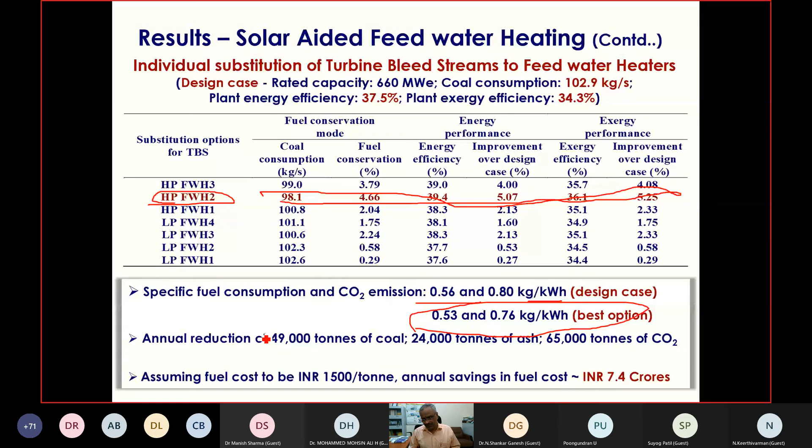Based on our analysis, it was found that the HP feed water heater 2 is the best attractive option to replace with solar heat. This reduces emissions substantially and increases efficiency—that's the best option. The annual reduction is almost 49,000 tons of coal and corresponding carbon dioxide results. So it's very important to go for solar substitution in coal-based power plants, because coal is now an expensive proposition.

So now we have done standalone CSP 4E analysis of standalone power plants, for a 5 megawatt and a 50 megawatt power plant. Suppose coal is there, or coal is not there—how do the power plants work? We have done Exergy and energy efficiencies for standalone power plants with a 50 megawatt LFR, about 12.17% and 17.21% energy and Exergy efficiencies reported here for different technologies.

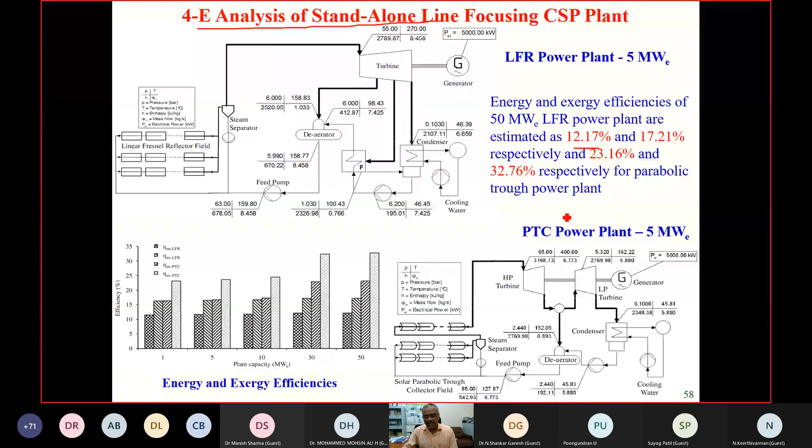Our approach is the 4D approach design. You've seen 4E, now 4D is the 4D approach through 4E analysis. 4D means design, development, demonstration, and deployment approach. The analysis is 4E: energy, exergy, economic, and environment analysis.

We have done this for a solar dish collector with different analyses, various configurations. This is the dish—the solar radiation concentrates into this, which is actually a boiler. This boiler feeds into the turbine. Steam goes to the turbine after expansion, after heating.

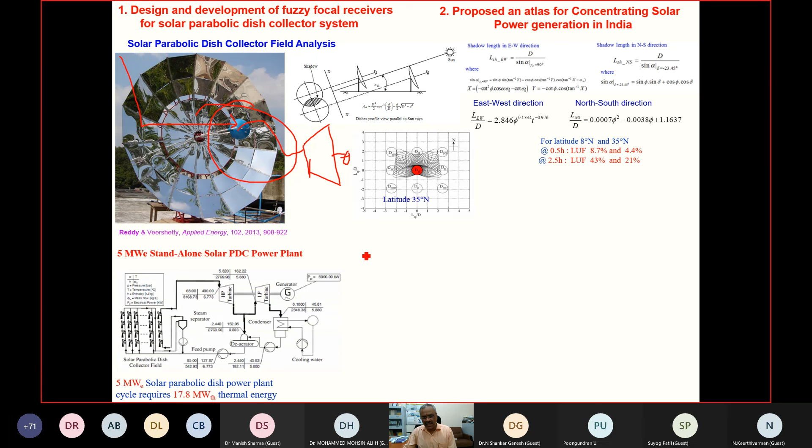We have come up with a study of entire India with a power plant atlas made for standalone solar power dish technologies, and we developed different criteria. Wherever the green area is shown, that is commercially viable. Blue areas are conditionally viable, and red areas are not viable for solar power generation. Based on land use—land is more expensive—the levelized cost of energy generation also plays an important role.

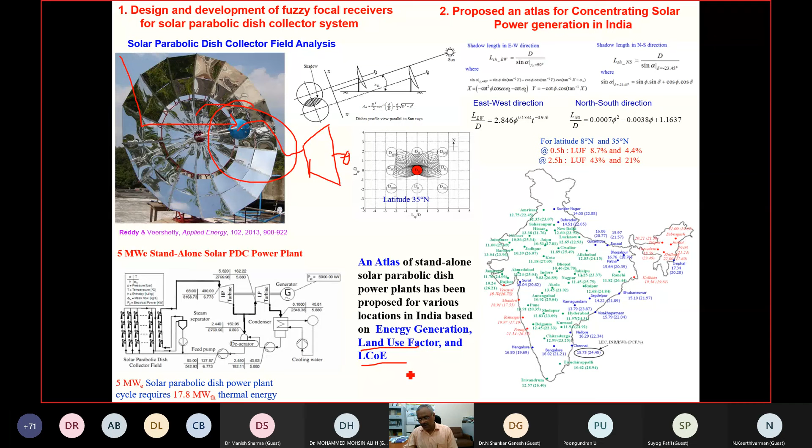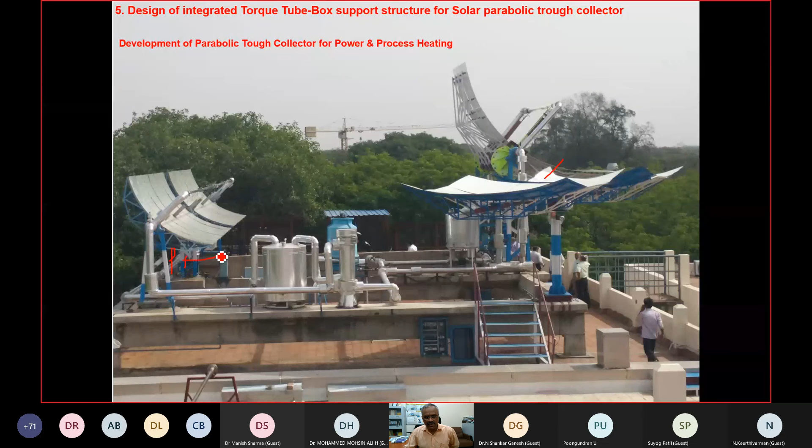We have set up this in a school close to Chengalpattu, that is Vallipuram in Kanchipuram district, at J. Krishnamurti Foundation School. We installed this with energy storage, an expansion tank and all. It produces 50 bar pressure at about 350 to 400 degrees Celsius, giving about 50 kilowatt thermal, and now 50 kilowatt, 500 kilowatt electricity.

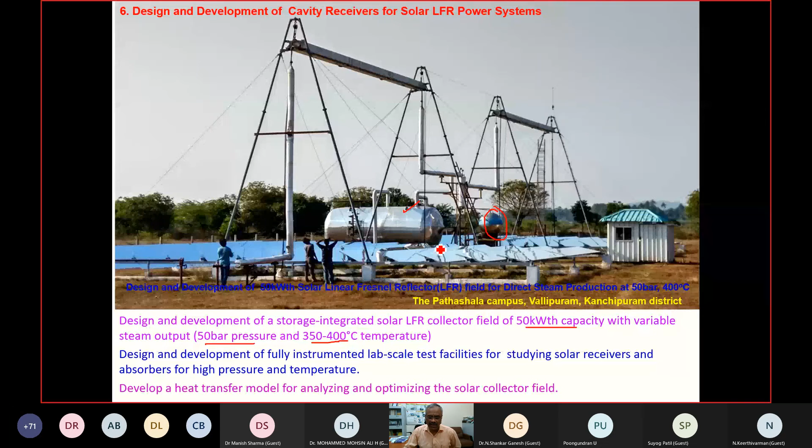We have come up with standalone parabolic trough collectors across India. Wherever red is shown, it's not viable; the green and blue ones are viable. I have given the statistics with the cost benefit ratio, the levelized cost of electricity generation, and other parameters like NPV, net present value, and so on. This is a complete comprehensive economic analysis, with attractive values depending upon the capacity.

So now integration, 4E analysis for various coal power and fossil fuel power generation is very important, as it gives indicators to where inefficiencies exist, so we can correct or improve the performance of these systems. But apart from that, in order to make these more sustainable, we have to go for solar aided power generation, and across India, if power plants are established, how we can come up with economic operating conditions.

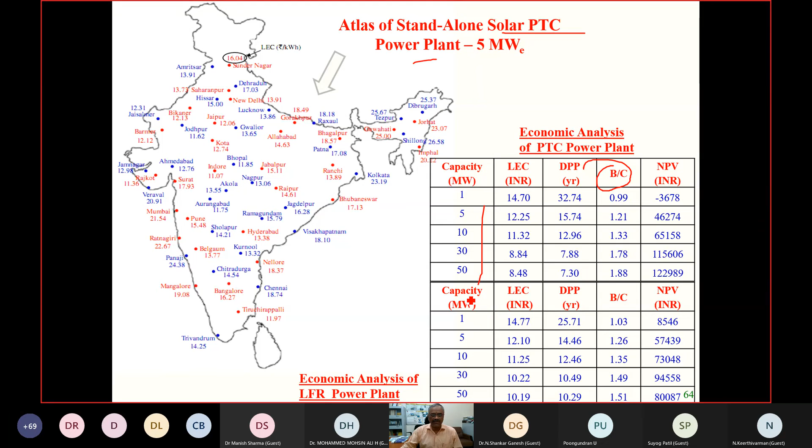So with this, I think I have touched upon these various aspects. I'll come to the conclusions now. Mainly, the integration is important, and single reheat with the supercritical power plant gives a higher efficiency of 39.5%, and optimized double reheat supercritical power plants give 40.3%.

Integrated gasified combined cycle gives about 39.7%, and there is the highest potential of about 44.6%. IGCC with imported low ash coals gives the maximum possible plant energy efficiency of 45.2%, up to 45% in Indian conditions. So ultimately, the solar feed water heater is very important.

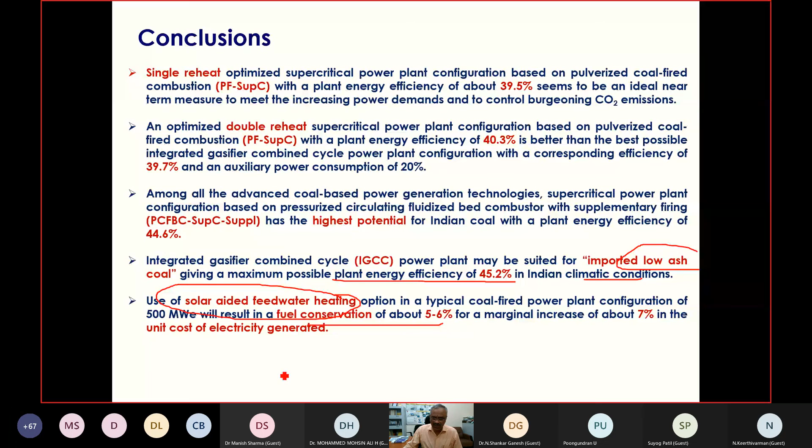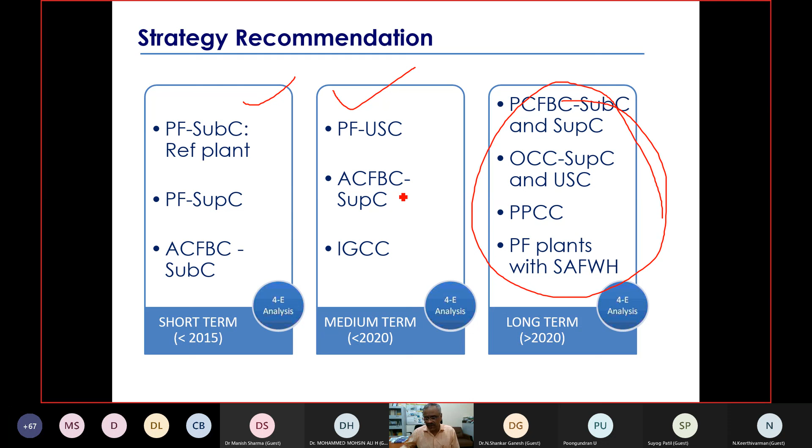I have given all the abbreviations before. So therefore, this is a strategy to recommend for the power sector, and one of our PhD students has done this work and come up with this, and some recommendations are given to the electricity boards and so on. So with this, I end the talk.